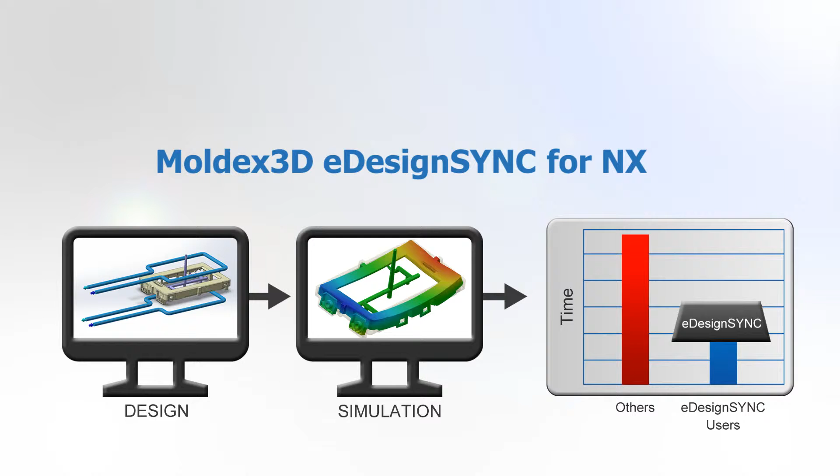Moldex3D eDesignSYNC is an easy-to-use interface embedded in NX to bring a seamless workflow from design to simulation. With the complete support of Moldex3D eDesignSYNC, designers are able to synchronize design changes and verify product designs with professional injection molding simulations, solving design and manufacturing difficulties more efficiently in a familiar environment.

This video will demonstrate the benefit of eDesign Sync in design optimization by using eDesign Sync on a simple connector model. There are 4 parts in this video.

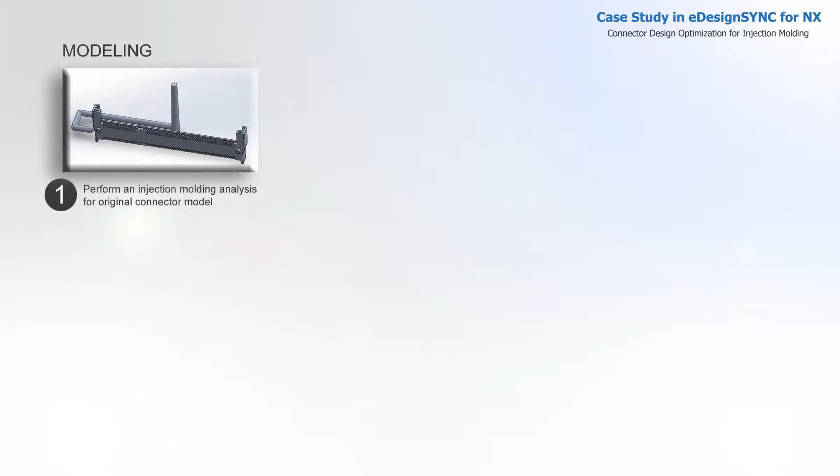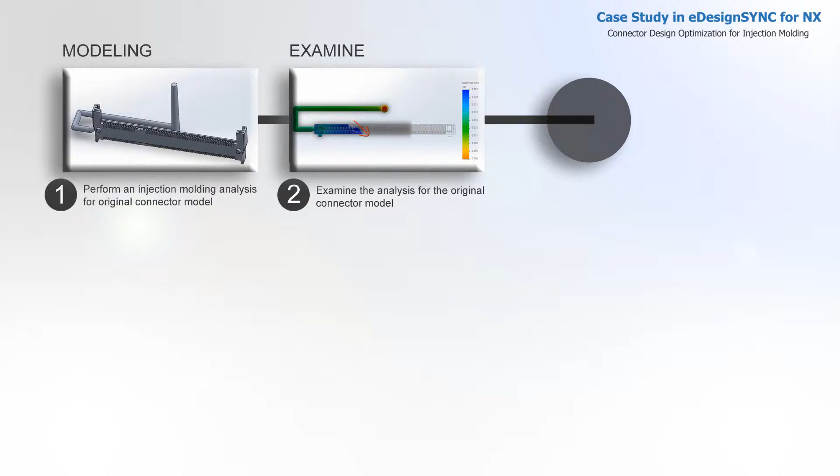Perform an injection molding analysis for the original connector model. Examine the analysis for the original connector model. After the analysis has finished, we go to check results. Modify the geometry to improve the unbalanced flow and warpage. Examine the result of the revised model.

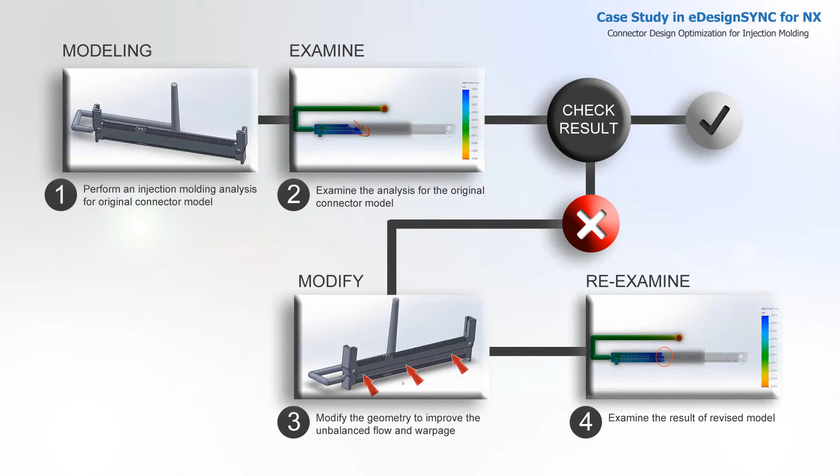The first step is to open the connector model in NX and launch Moldex3D eDesignSYNC. Click Part in the Tree menu and choose the solid geometry as part.

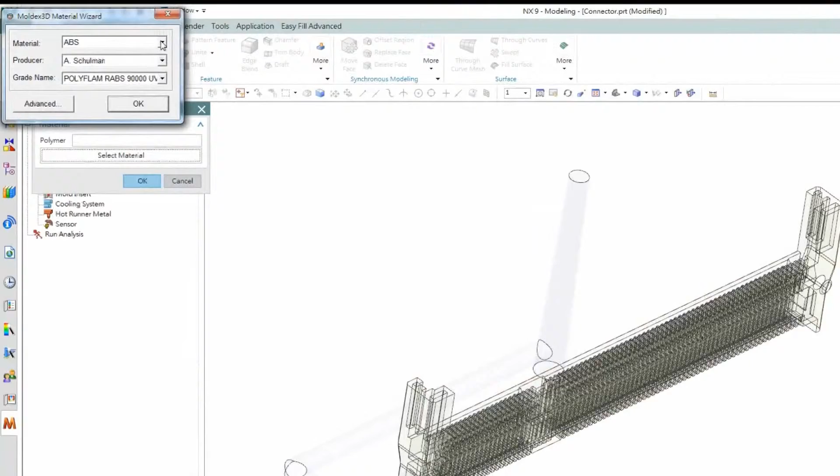After that, we have to choose a material. In this case, the material type is going to be LCP, and users can choose different producers and grades in this window. Click OK to finish this step.

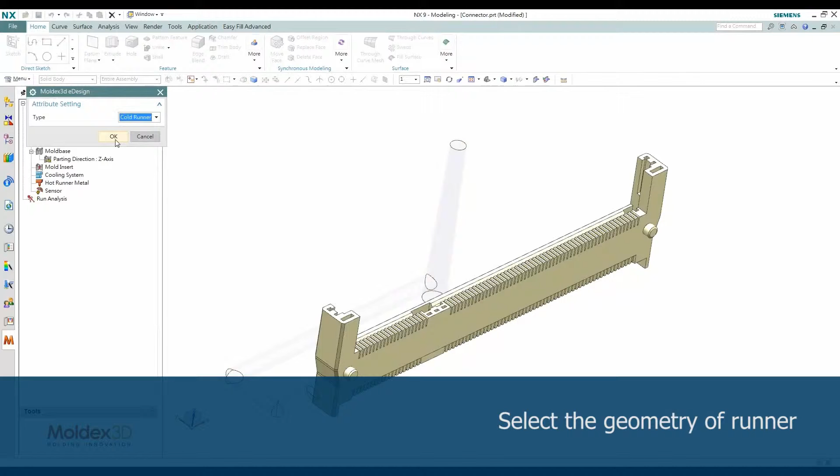Next, double-click Runner in the Tree menu to define Runner. Select this solid model in the screen as Cold Runner. Now the solid model is attributed as a Cold Runner.

A melt entrance is also a necessary element for injection molding analysis. The melt entrance tells the software where the plastic will start to flow from. We need to select the top surface of the Cold Runner as a melt entrance.

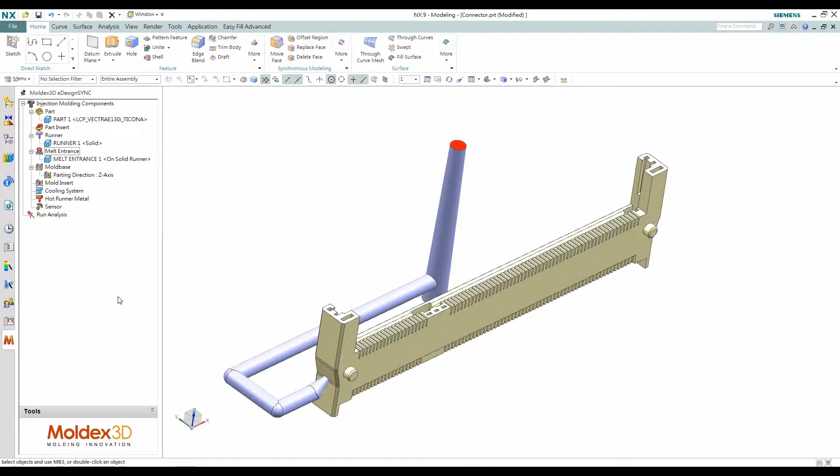In eDesignSYNC, Moldex3D provides automatic mold base building. We can use this function to auto-generate a mold base. Then we set the mold base metal material by default.

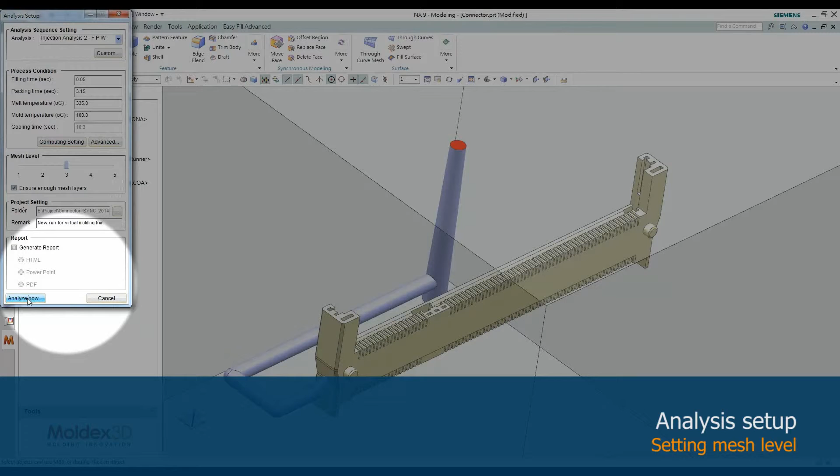Before we start the analysis, we have to set the simulation sequence, process conditions, mesh level, project saving path, and report format in this window. Then click Analyze Now to start the analysis.

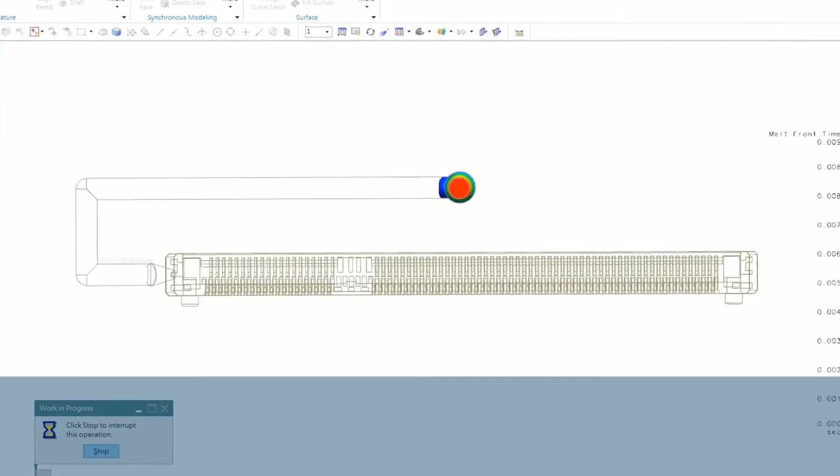After the analysis has finished, we go to Check Results. In filling analysis results, we check the flow pattern from the melt front time result. It shows obvious racetrack effects in the filling animation. The racetrack effect leads to unbalanced filling and may cause uneven volume shrinkage, air trap, and weld line in the part.

If we watch the animation again, we can see the air trap and weld line indeed exist in this flow simulation.

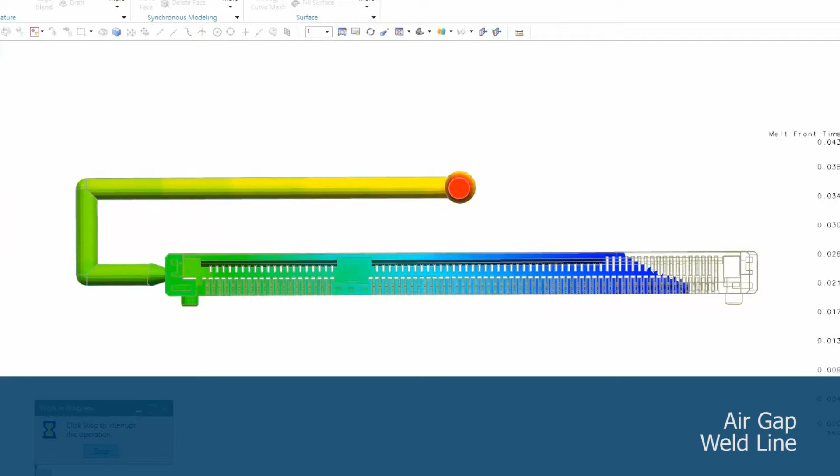The racetrack effect can be solved in several different ways. For this part, we will decrease the thickness on one side of the part to balance the flow. We use several CAD tools in NX to cut a slot on this side of the wall.

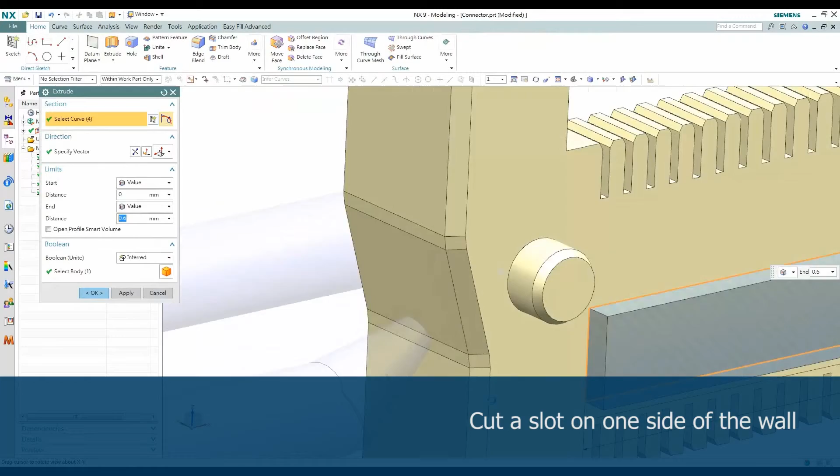We want to analyze a modified model to confirm the design change is effective. For comparison, the analysis setup is the same as the original one.

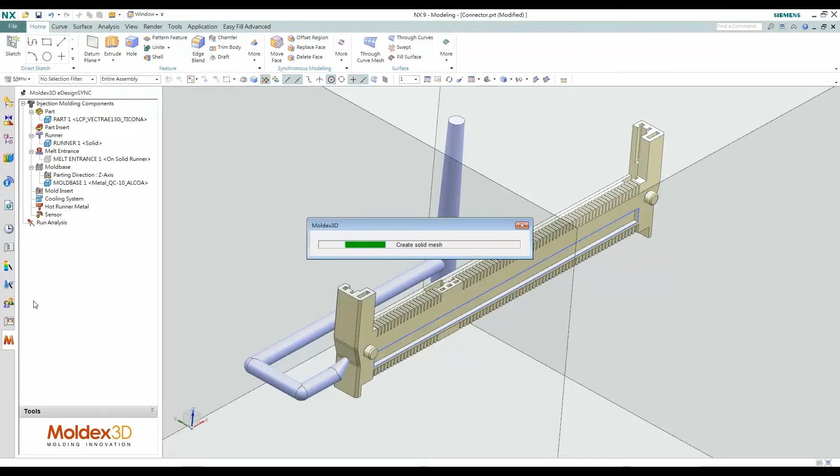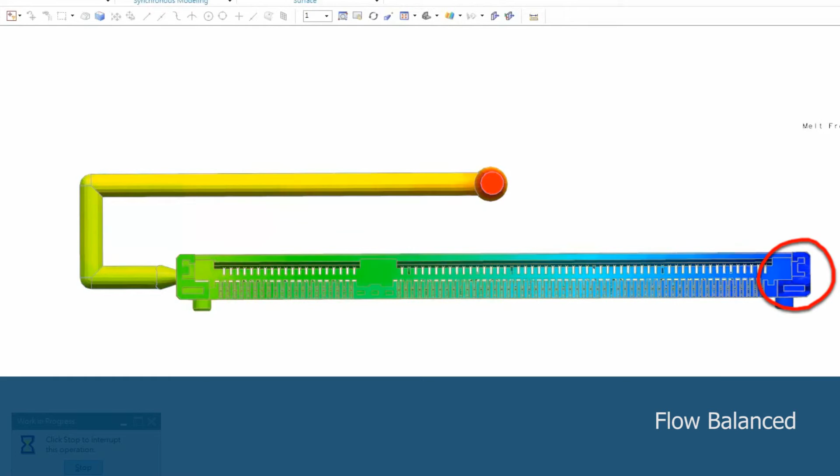Let's examine the results of the revised model. We find out that the flow pattern of melt front is more balanced than the original one. The melt front evenly reaches the end of the cavity almost at the same time. Because of the balanced flow behavior, the revised model shrinkage is more even than the original design.

The integration between design and simulation creates a high-performance design platform that gives designers the ability to examine, optimize, and seamlessly create mold designs. Finally, it enhances product quality and reduces costs through eDesignSYNC for NX.